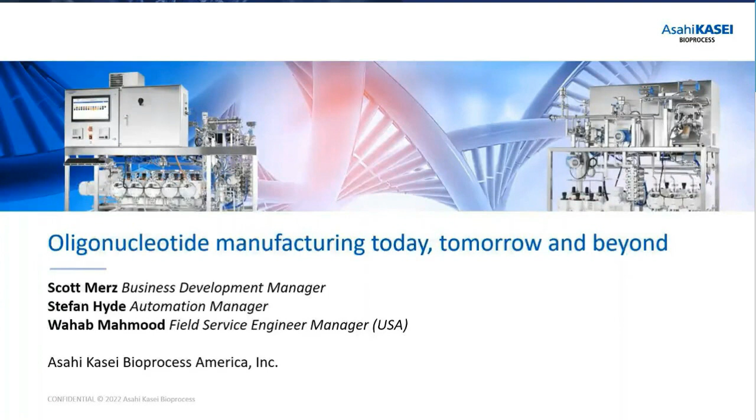Our facility is headquartered in Glenview, Illinois. Within that facility, we do everything listed here on the slide, from engineering to design development, servicing, demonstrations, FATs. Again, everything is done in the Glenview office, and all the equipment is actually designed and built in the U.S., using the various machine shops and facilities within the greater Chicago area. So again, everything is USA made.

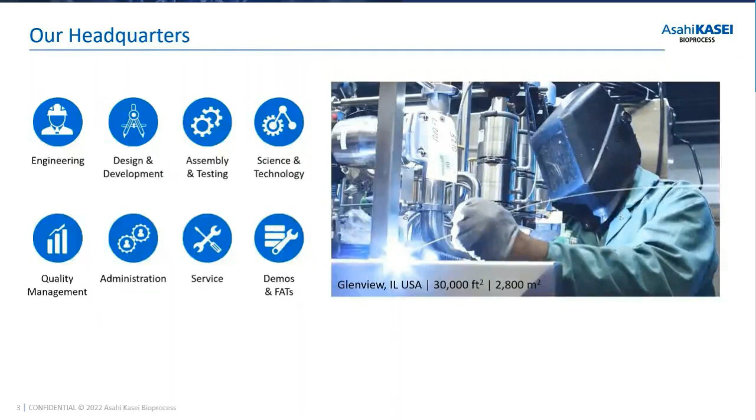I'd like to speak about trends of oligonucleotides. This is an interesting topic for us because we are seeing tremendous growth within this industry. It's a very young industry still by pharmaceutical standards, but this growth has stemmed from the maturation of the industry and the following items: improved delivery mechanisms, broadened therapeutic targets such as ASOs, siRNAs, aptamers, CRISPR, all those targets, which has resulted in well over 300 active clinical trials at various stages within the FDA. So again, it's a very growing industry that is very exciting to be part of, and we look forward to the challenges coming this way.

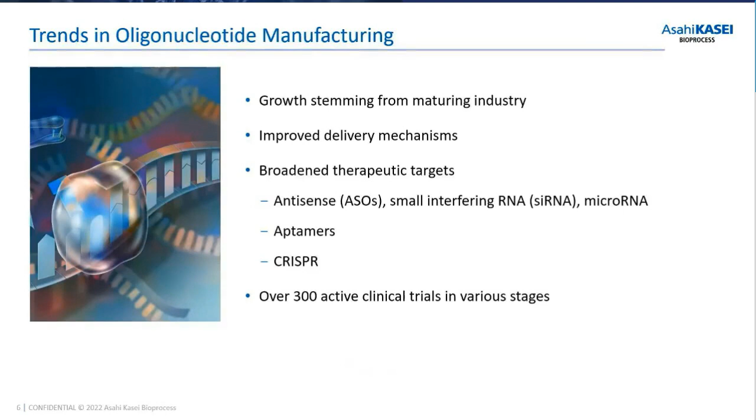Speaking of growth and challenges, how to meet that growth: we've identified at least 5 different manufacturing trends that are trying to meet the growth. One would be process scaling, which is the modernization of facilities on a biopharmaceutical process, even an oligonucleotide process. We're seeing tremendous growth in people updating and modernizing their facilities, and Stefan Hyde will be speaking to that in a moment. Improved machinery: there's always continual improvement with the equipment that we're making. We're always looking to help our customers run more efficiently and as into an automated process as possible.

Sustainability is becoming more and more a global concern: how to minimize overall liquid volumes while also maintaining high titers and how to make process operations more friendly. There's also an interesting new development, or next generation - we're looking at enzymatic synthesis platforms as well. Digitalization, meeting Pharma 4.0 - this is one of the topics that Stefan will be speaking about. And then there's always the infamous pursuit of an ideal synthesis where it's a completely dry closed system, with no dead volumes, and efficient plug flow for the chemistry.

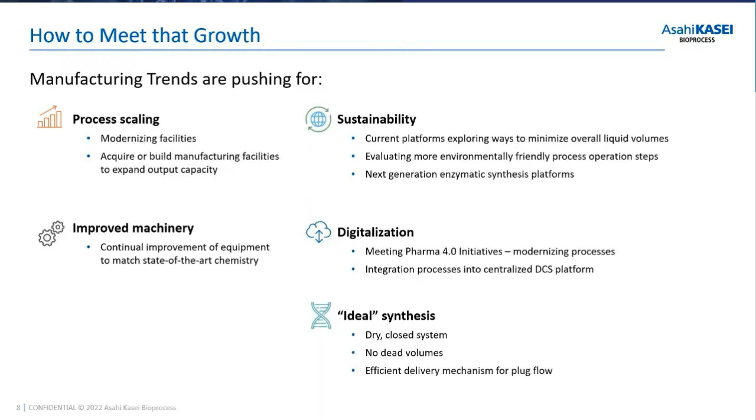It's ideal, and we're striving to always challenge ourselves to meet and attain this type of synthesis. So exactly though, how is Asahi trying to meet these challenges? We're doing it a number of different ways.

One way is combining our extensive knowledge of fluid management systems into downstream processing, dedicating our work to developing nicely crafted technology for the customer. We take pride in designing and engineering equipment.

We think we have the industry-leading high performance columns, systems, and automated solutions. We have our OCELOT system control software, which is also OPC ready, allowing us to connect with other platforms fairly easily.

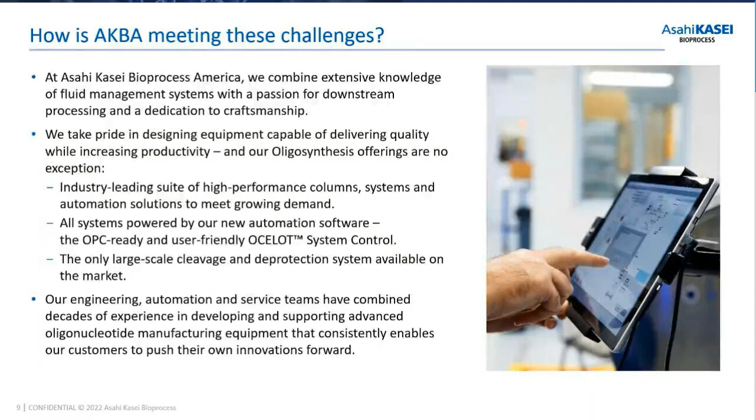And then we have really the only large-scale cleavage deprotection system available on the market for the oligonucleotide area. With that, the engineering and automation service teams combine with decades of experience in developing and supporting advanced oligonucleotide manufacturing equipment that consistently enables our customers to push their own innovations forward.

Now let's take a look at the Asahi Kasei equipment that we're promoting. First is our oligo synthesizer. This recently was awarded a patent over in the EU, and it's a system that we've had around for the past 17, 18 years, which we're constantly making improvements to along the way. This is really the heart of our oligonucleotide synthesis platform.

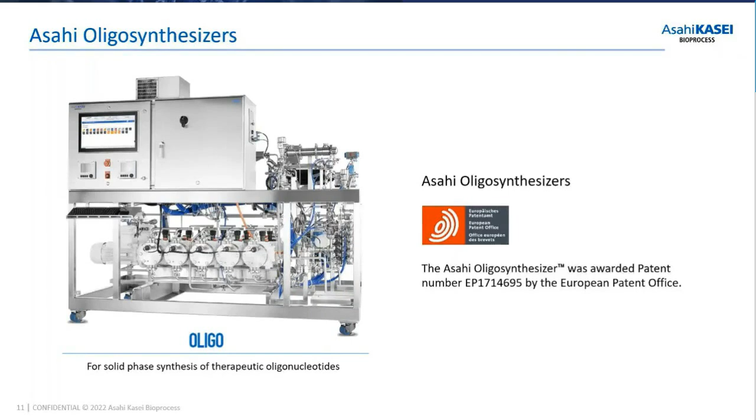The synthesizers use a zero static valve manifold, which sets us apart from the competitors, allowing for the highest coupling efficiency, improved yields, and reduced wash volumes.

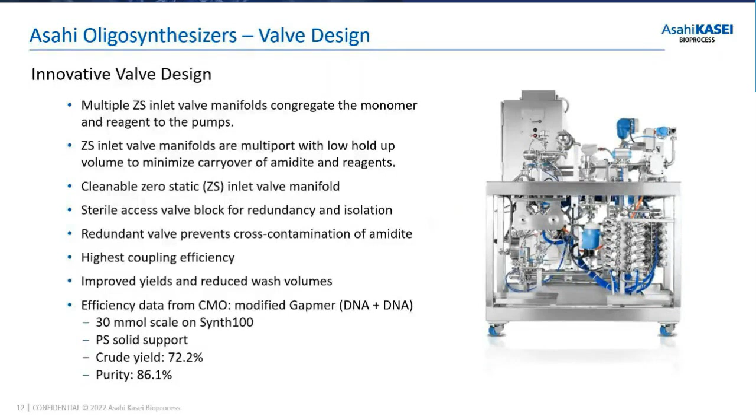The oligonucleotide range of products is generally listed in millimole terms for product specification, from 10 millimole systems up to 2.5 mole systems and beyond. But the reality is these systems are custom designed and built for you, based off of flow rate, not necessarily a millimole specification. So the conversations we have involve what your flow rates need to be, from product loading to wash volumes, and that's how we design and build our systems accordingly.

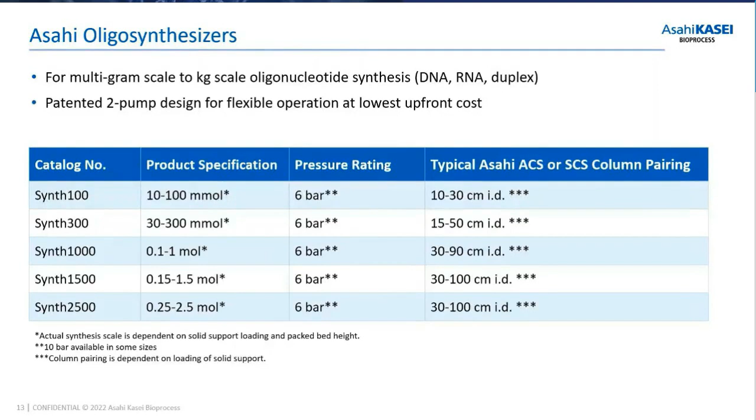These skids are paired with our columns, and we have two types. The first is what we call our SCS columns, a static column approach used globally. They are probably the world's most popular synthesis columns by ease of use and overall popularity.

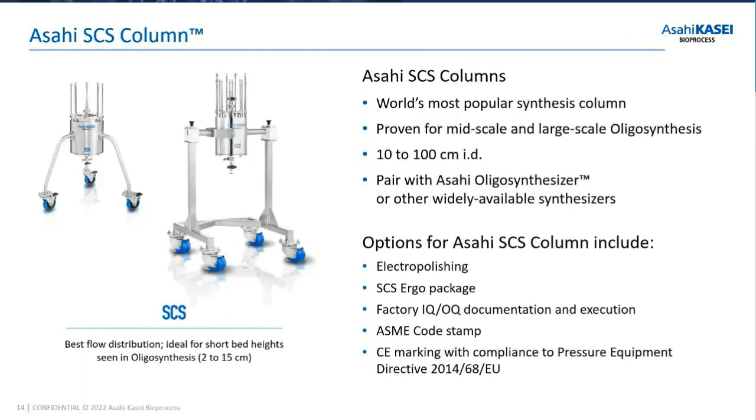They range from 10 to 100 centimeters ID. These columns are incredibly efficient and easily scalable based on our design. These static columns allow for swellable solid supports, one of the many supports used within the industry. They're designed so that the supports can shrink and swell without damage to them or the molecule itself.

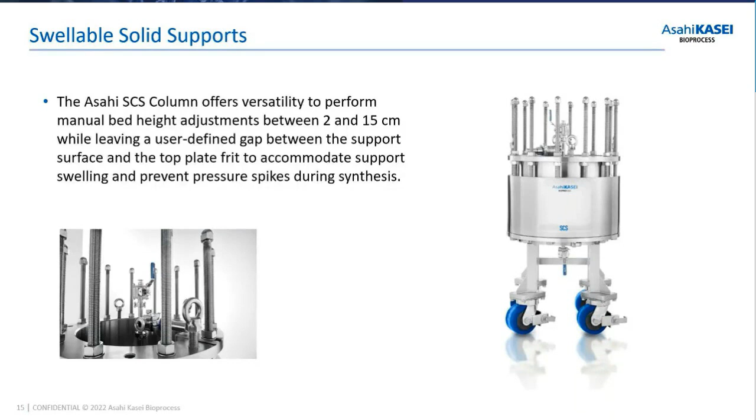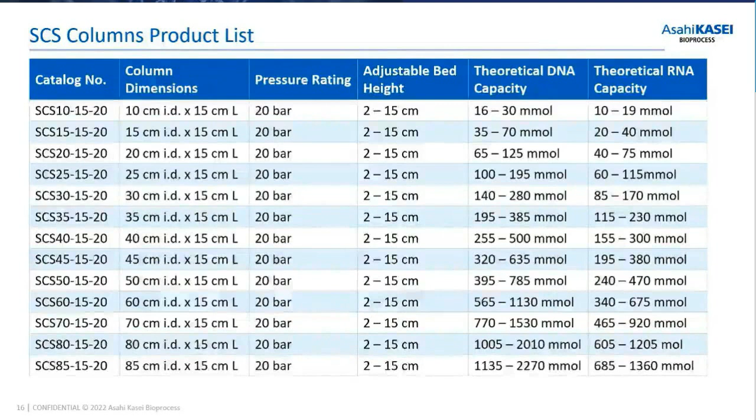The product list for these columns is wide and varying, from 10 centimeters up to 85 centimeters as listed here. 100 centimeters is definitely within range, and even beyond. These columns are very scalable in their design platform, so we can choose any scale in between if you need a custom-made column.

The other column is called the ACS column, and these are adaptable or adjustable. They operate similar to a dynamic axial compression column, in that the piston moves up and down based off a hydraulic cart -- not a manual piston position like the SCS column. These are widely used within the industry and allow for the same type of efficient flow process as the SCS columns.

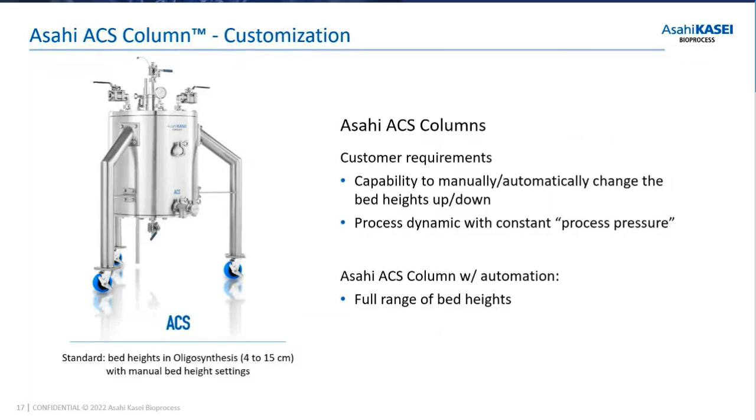Similar to the SCS columns, we have a full range of products listed here, from 10 centimeters up to 85 centimeters -- no difference there, very much the same. These are designed based on theoretical capacity of the molecule you're trying to build.

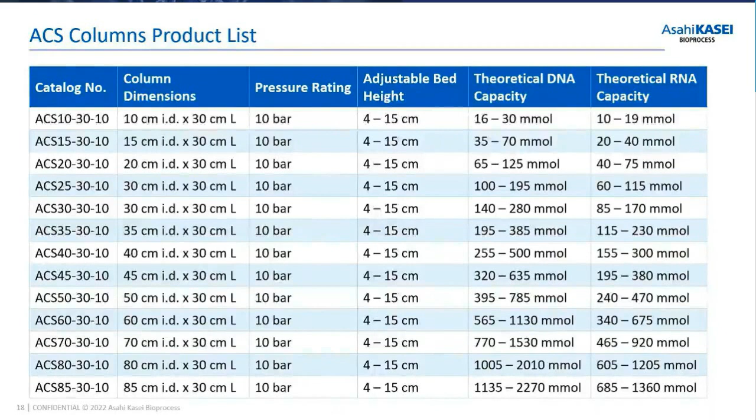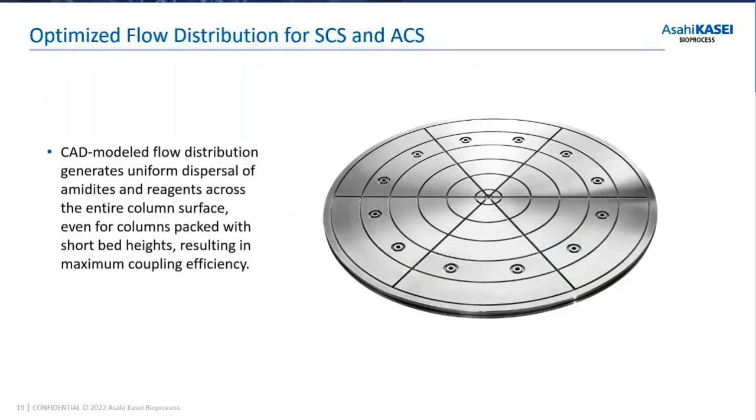I did mention that these columns have a unique flow distribution and plug flow that makes them very popular. We have radial and axial grooves on the backside of the distributor plate that allow for flow distribution across the column in a plug flow approach. It's very unique and allows for very efficient coupling processes.

Lastly, as far as equipment needs go, there are two other items to speak about. There's the C&D, the cleavage and deprotection system. We are the only ones providing large scale, process scale, custom cleavage and deprotection systems for the industry, which can be used for both RNA and DNA syntheses.

Again, we work with you to understand the flow rate needs of the process, not just based off of a millimole sizing.

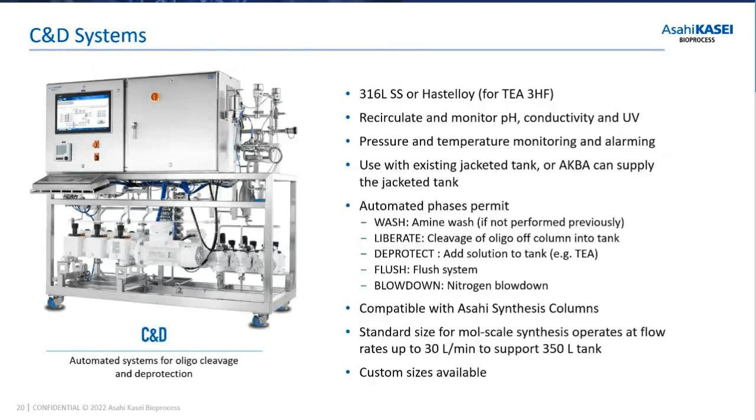The C&D system itself is very basic in design. In fact, it's a very simple P&ID that we're showing here. You can recirculate through the tank or the column, or there's another option where you can have additional pumps to bypass if need be. But again, just to kind of show you a very basic P&ID on this.

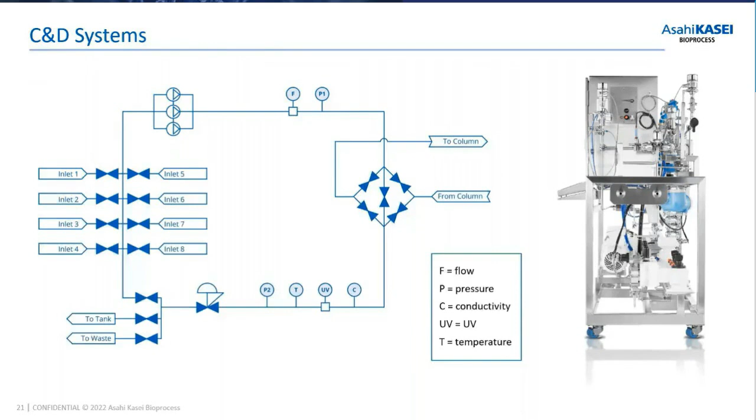And the final additional piece of equipment that is used is slurry prep systems. Again, we're the only ones providing this type of large-scale system that's custom made for the process, and it's essentially a very simple design as far as P&ID would go. You have your slurry in a tank that has a pneumatic mixer to keep it a homogeneous mixture, or you can recirculate it within the tank as well before you put it into the column.

So that's the equipment side of how we're presenting and how we're going after the oligonucleotide synthesis market. Now my colleague Stefan Hyde would like to talk about the OCELOT platform, and we are looking at the digitalization.

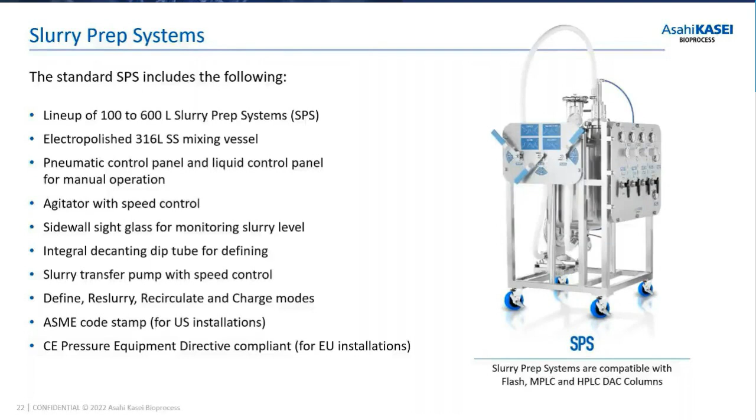Scott gave us just a brief foray into some of the topics that we're considering in the automation space at AKBA as it relates to digitalization and integration of equipment. I want to expand on those, explain maybe what Pharma 4.0 is as a brief introduction, why we should care, and how AKBA is supporting your adoption and migration in this new digital environment.

So just to get down to the roots, Pharma 4.0, as coined by the ISPE, International Society for Pharmaceutical Engineering, is a specific introduction of Industry 4.0 concepts to the pharmaceutical industry. This term, Industry 4.0, refers to the so-called Fourth Industrial Revolution, which, as you might imagine, is preceded by the First, Second, and Third Industrial Revolutions.

The boundaries of those periods are defined differently by different groups, and they often overlap since adoption times vary drastically by region. But broadly speaking, we can agree that the First Industrial Revolution is defined by the steam engine and weaving loom, or early mechanization. The second with the adoption of electricity and assembly lines. The third with the introduction of computers and automation. Then the fourth and current industrial revolution with the so-called Internet of Things, IoT, and broad-based networks.

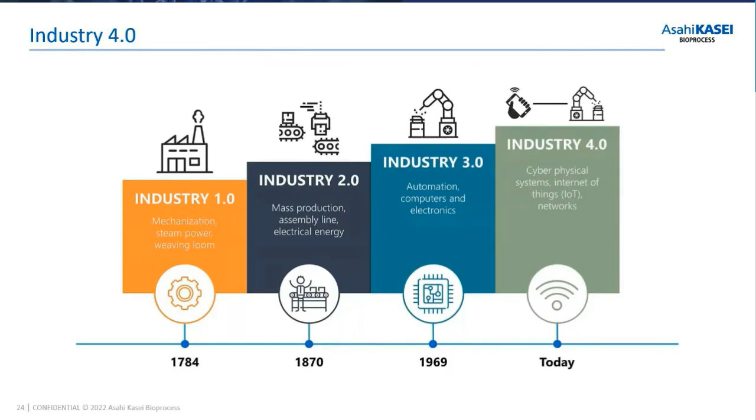Pharmaceutical production based on Industry 4.0 factory design really becomes, quote, Pharma 4.0 when these same ideas are applied to GMP compliance, validation, and GAMP requirements. Those are kind of unique to our industry as it relates to other industries and other Industry 4.0 considerations.

Pharma 4.0 is not a product, but rather a framework that consists of many elements and enablers. Those are shown in this nice diagram from ISPE. The elements here being resources, information systems, organization, processes, and culture, and enablers being digital maturity and data integrity by design. This operational model is a methodology for processes from product development all the way up to commercial manufacturing.

Those terms that you saw in the previous diagrams, elements and enablers, actually come from ICH's Q10 guidelines for pharmaceutical quality systems. The ICH Q10 elements and enablers are shown in gray in this diagram, and I think you'll find those quite familiar: corrective action, change management, etc.

New elements that are made possible by digitalization are shown in blue. And when you combine those elements with the new enablers, being digital maturity and data integrity by design, they form a holistic control strategy for the complete product lifecycle.

I think it's important to note that this digitalization effort is not an IT project. It's really a project for your whole organization. When we hear the word digitalization, we think computers, automation, IT, but this model requires information exchange both vertically and horizontally throughout your plant. And that means that all departments and stakeholders need to collaborate to enable this data integrity by design. Your IT department doesn't really know what your critical quality attributes are, what your critical process parameters are, and those are key tenets of...

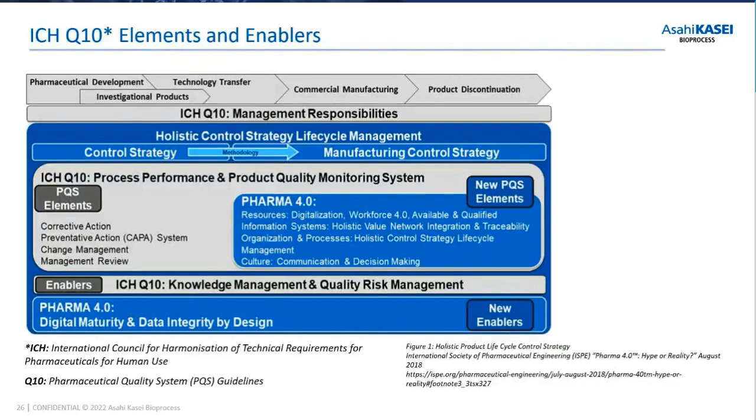And those are key tenets of this process. That broad collaboration is going to be imperative to properly identify those CQAs and CPPs, and that identification is really going to inform your digitalization strategy.

Of course, before we set off on an effort towards digitalization, we must understand the benefits. We don't just want to adopt shiny new technology because it is shiny, but we need to have a practical business case and tangible benefits. And so I've identified a few here.

The first being quick access to data and real-time reporting. This can allow you to make critical management decisions with very little lag. That could be either quarantining product or qualifying your batch.

This technology supports your workforce. It helps with operator training. It can help reduce human error and identify issues. Your operators can get similar data presentations from different systems. We can reduce human error and identify issues, and we can give feedback to the user maintenance team to minimize downtime. You might have indicators that tell you that a system is approaching failure.

These technologies can prevent data loss. Things like UPS and robust backup technologies prevent you from throwing away good product because you've lost data.

And perhaps the most important piece of this is that we can prevent equipment obsolescence. There's a big capital expenditure associated with new plant builds, qualification, validation, and ICH Q10 and Q12 are really focused on this continuous process verification concept.

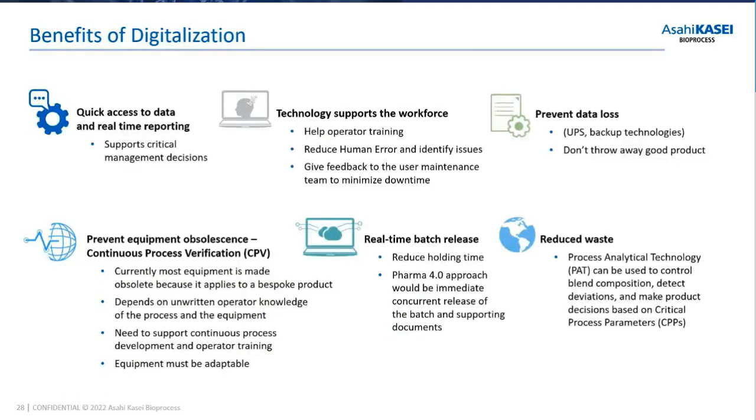Now to talk about AKBA's automation platform, specifically the OCELOT system control, and how we're enabling some of this digitalization effort. Our goal is really to be your plug-and-play platform. We are collaborating with our industry partners.

We are an active member of the BioPhorum plug-and-play work group, and BioPhorum is a kind of industry-wide collaboration to further these more generalized efforts. To that end, I'm going to focus on the two key aspects of our systems.

First, the IT side. All of our systems are developed on virtual machines in Glenview and deployed to physical hardware as needed. We can also provide them to you and your site as virtual machines instead.

We build our systems on Windows 10 Enterprise, which means seamless integration with your plant, easy synchronization with your Active Directory, time synchronization, use of your remote desktop technologies or other supervisory technologies, network backups and asset management. All of our security privileges and timestamps use the Windows groups and timestamps, so there is no special additional layer to deal with.

All of our data is stored in standard formats. The SQL database is made accessible to the end user at the administrative level. We have exports and reports available in PDF and CSV format for any relevant batch data, such as audit trail or trend data. And that level of accessibility of data also supports your MES and ERP decision making.

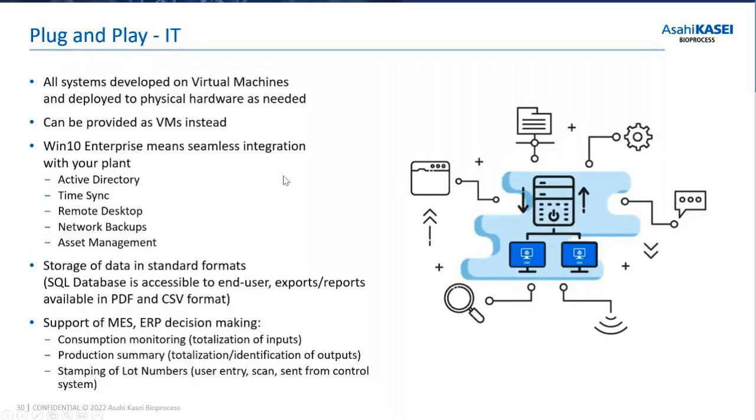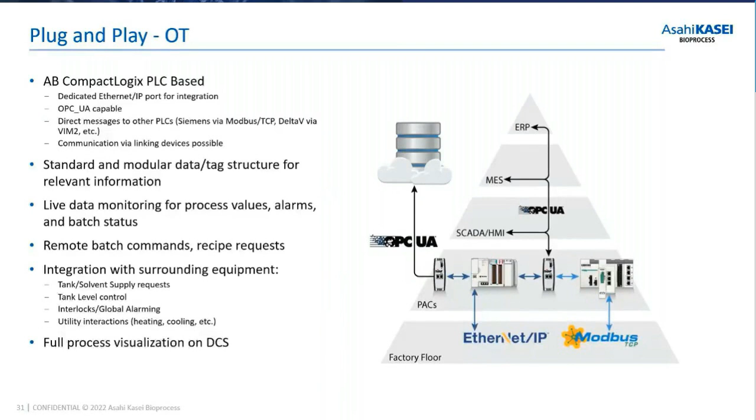And finally, depending on the level of integration that you are hoping to do, we can support your full process visualization on your DCS by providing the data structures and also consulting with your team.

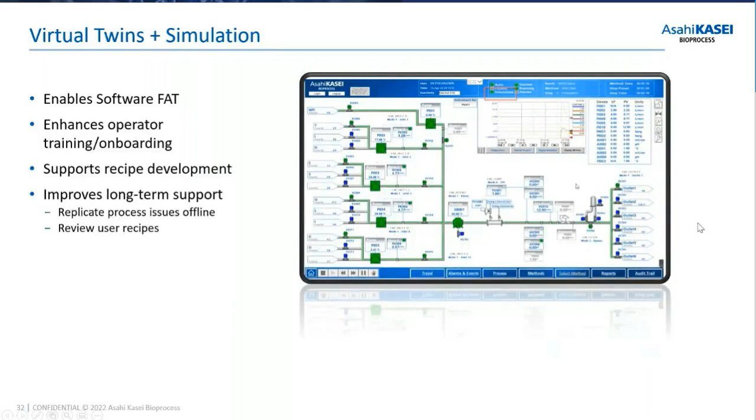Finally, we provide a user-facing simulation mode, which is highlighted here in the graphic. So any of your recipe development can be done and executed without using any solutions at your plant, and you can kind of see how the system is expected to respond. So it's really helpful for operator training as well.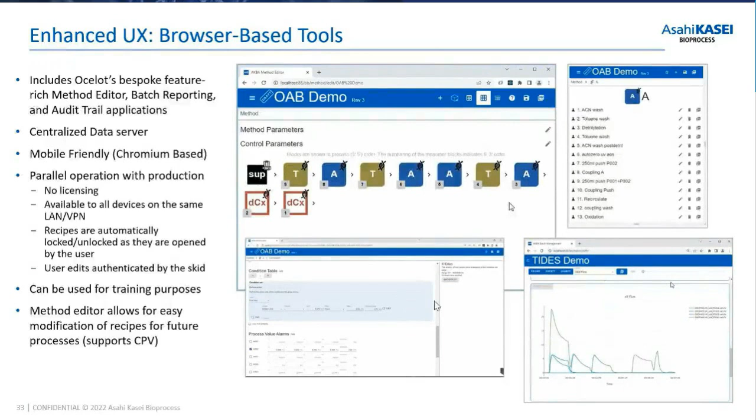To do recipe development. And our method editor is just simply very adaptable. It provides a lot of user clarification, and it allows for easy modification of recipes for future processes, which supports the CPV concept.

Finally, I'll kind of build on that. Our systems are ready to support your rapid process development, both for initial launch and then also for the CPV concept as you try to adapt equipment to new processes later.

OCELOT systems all employ PAT to enable system decision making based on CPPs, and that can include end of stream detection, blending and in-spec monitoring, fractionation control, step end conditions, and user prompts, and reaction completion indications. So all of those are made available to your users, and then you can identify your CPPs and use them as batch inputs.

OCELOT System Control simplifies process development with a full swath of user tools. We provide auto-tuning of PID loops for optimization of your complex processes. Our engineers will provide our equipment with pre-tuned controllers for all of your more simple processes as well.

But you can also configure defaults for almost everything in the software. So chart presets, report templates, recipe parameters, those things can be parameterized ahead of time.

And then finally, I touched on the method editor and recipe development, but a couple key features. We have a function that we call control parameters, which can replace any numeric entry in your recipe, and you can parameterize your recipe so that you can modify it at point of use.

So instead of, for example, typing 25 centimeters per hour in your detritylation flow rate, you can rename it as the parameter dflow, and then at the point of use you can modify that parameter.

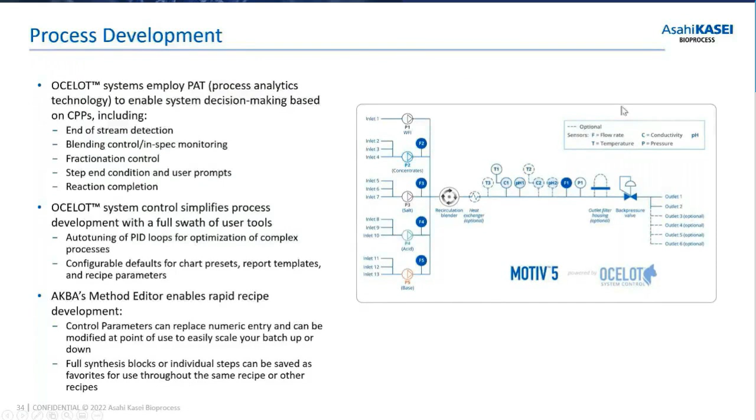With that, I think I've covered my points on OCELOT system control, and I would love to turn it over to my colleague Wahab Mahmood from the field service team. Thank you, Stefan. Great presentation on our automation for our Oligo synthesizers.

So now I would like to talk to everyone about our maintenance services that are provided by Asahi Kasei Bioprocess to make sure that the systems, particularly the oligosynthesizer system, run smoothly and there's no hiccups, no downtimes for the customer, or minimized downtimes.

So we strongly stand by our slogan, which is built for you. All of our systems are custom made for our customers with great precision. Our designers take great pride in working continuously with our customers, making sure that we meet their footprint demands for their site, and also the aesthetic looks. And most important of all, the specific placement of components on these skids.

Depending on their placement, it's very critical that a maintenance personnel should be easily able to reach a specific component and be able to service it properly without any issues. So we take great pride in making sure that all the final assembly is seamless, and all these things that I've just discussed are well taken into account when we're doing the final assembly in the system.

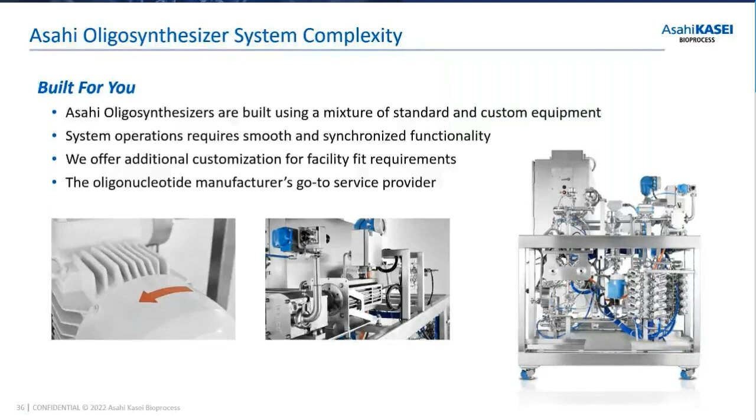And we are the oligonucleotide manufacturer go-to service providers. And the reason why I say that is our service team is composed of highly trained professionals. They go through years of extensive training before they're on site for a maintenance job.

What we want to do is make sure that they're trained and well prepared so that all the components they work on are serviced properly. All components are changed, and every component on the system is well inspected to make sure that the system runs efficiently. We also take great pride in safety awareness.

When it comes to site safety awareness, we follow the PPE guidelines. We make sure that we also follow our own safety guidelines. Safety is key, not just for ourselves but also for our customers. We want to make sure that there's no mishaps at our customer site, which could lead to downtimes.

At the customer site, as far as our maintenance plans, they are very flexible. We have preventive maintenance plans. We have predictive maintenance plans. We can customize our plans based on our customers' needs. We can customize them as annual or biannual or based on hours of operation.

Some of our customers run 24/7 and might want us to come out once to do a preventive maintenance and once to do a check on their system to make sure that everything's operational, everything's working fine, nothing looks out of ordinary, that the system will continue to run at least until the next PM. And then we can do an inspection again.

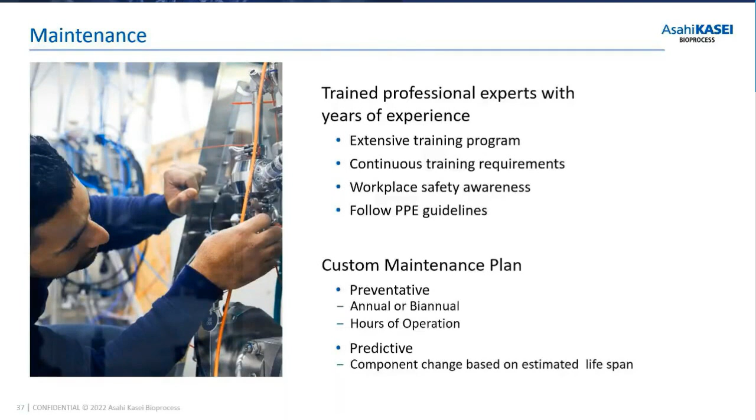And we also do predictive maintenance plans where we would recommend to a customer if during inspection, for example, a component looks like it's about to go down or if it's not functioning to its maximum capacity at peak performance, we can recommend to a customer that this component should be changed to avoid any mishaps down the road.

The other thing that we take great pride in doing is guiding our customers when it comes to parts. Parts are very critical when it comes to maintenance, and having the right parts and having the right parts on time is a huge advantage, and it really makes sure that the entire facility is running on time, that production is meeting its deadline, that there's minimum downtime.

So we take great pride in guiding our customers. We feel like we're their partners when it comes to making sure that they're meeting their deadlines, that they're using the system to its max performance.

So we guide them on their preventive maintenance parts, and also make sure that a sufficient quantity of these parts is maintained at their site at all times.

We also use the first in, first out approach to reduce waste. Some parts might have an expiration date, and if parts sit on a customer's shelf for a long time, they could expire and be thrown out as waste. So before starting our work, we ask them to provide parts from their inventory so we can swap them out to reduce waste.

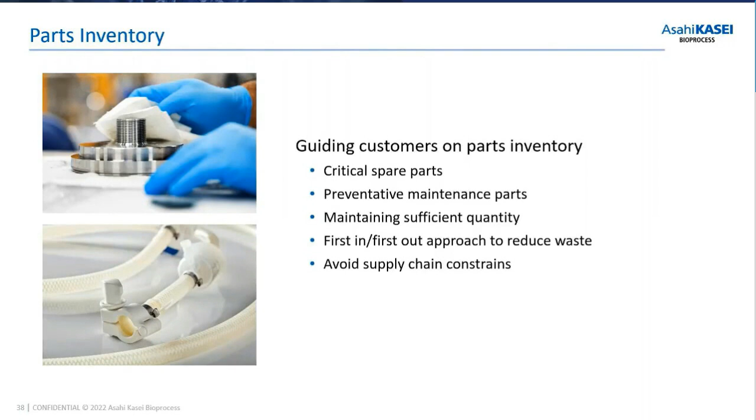I want to talk a little bit about our mission, which is providing new value to society by enabling living in health and comfort and in harmony with the natural environment.

Service is a key part of sustainability. We want to make sure that production is sustained, but also take into account the effect that has on the environment. We want to increase the lifespan of components in a system by making sure they're serviced properly, so there's almost no downtime when customers are running their processes, and we avoid disruptions to reduce waste.

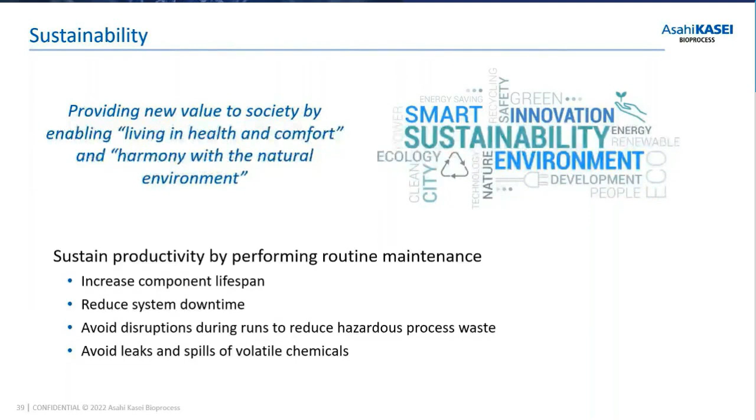Sometimes when customers run into a critical issue and a system goes down in the middle of a process, they might end up with excess waste, halfway or quarter-way through, that they have to get rid of. We want to avoid those kinds of situations by making sure systems are maintained and running properly.

At Asahi, we're also always thinking about the future of field service, and one of the things we're strongly looking at is augmented and merged reality. The future is moving towards merged reality.

The reason why is the response rate. We can instantly provide a response to our customers when it comes to troubleshooting. If they're having a critical issue, rather than getting on the phone, sending an email, or coming on site, which could take days or weeks, we can instantly support them via merged reality, guiding them step by step on how to troubleshoot an issue and fix it.

Not only that, we can also provide training. Training is key when you're looking to run a system. If proper training isn't utilized, there could be mishaps, a system could be abused, equipment could be severely damaged, and that just increases downtime.

So we want to increase uptime, and in the future we want to reduce the time it takes for service personnel to come on site. We'd do that by using merged reality, and by doing that, we also make a dent in reducing carbon emissions by reducing our travel.

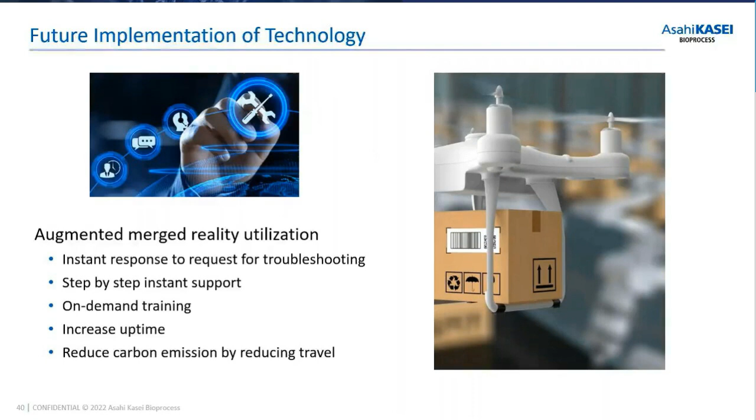Travel at times could be 50% of the total time needed to service or be at a customer site. So if we can make adjustments to reduce travel and reduce carbon emissions, that would help the environmental aspect of it.

Lastly, I'd like to talk to you about our 847 Continuum program. 8 stands for our company values: sincerity, challenge, creativity, wisdom, curiosity, growth, passion, responsibility. 4 stands for our core services: support, parts and consumables, training, and maintenance. 7 is 7 days a week.

Our dedicated international team is here to serve our customers. We take pride in our 847 Continuum program, which helps our customers continue to run, reduces downtime, and makes sure their systems are maintained throughout the year.